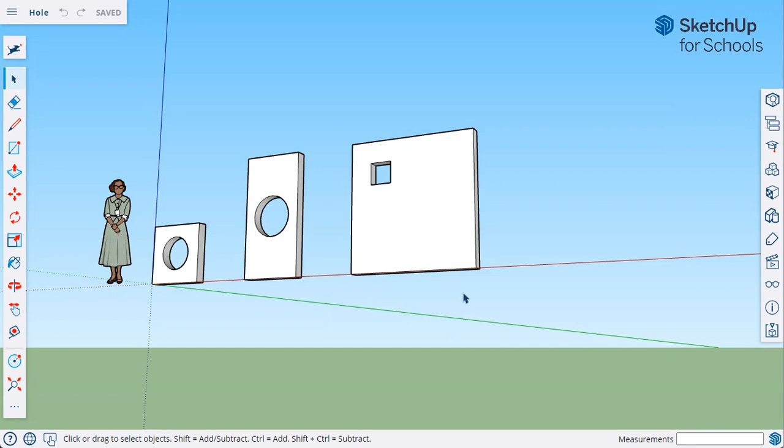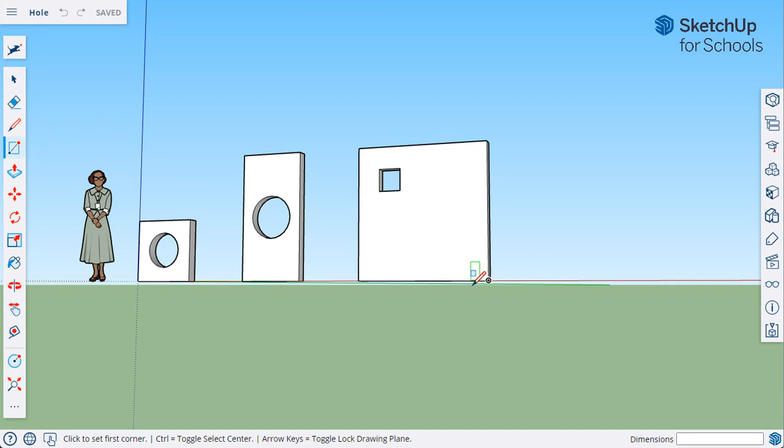Okay, so let's create another rectangle, 6 feet by 6 feet. Let's switch into a view where you have more sky, and then make a rectangle on this face. Make sure you press Shift to put it on that face. Let's just do this here because it's thinking I wanted to still put it on the ground.

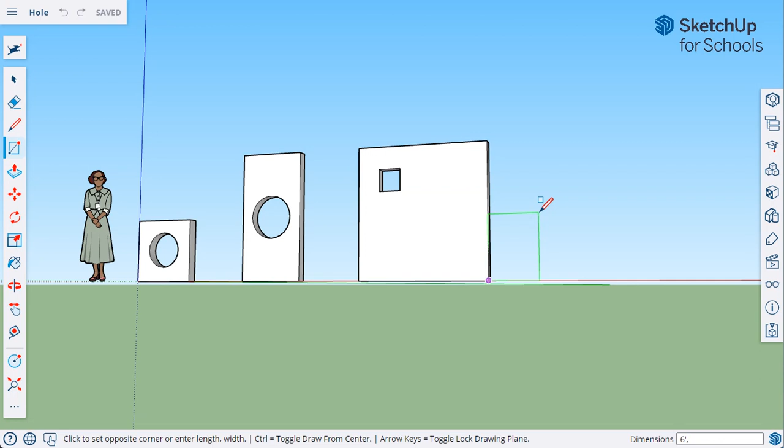Once I have that green, I put in 6 feet, comma 6 feet, and then I move that apart. I go to my select button, triple click, 1, 2, 3, and then move that away 3 feet. And then I'm going to use the push pull button and push it back 6 inches, so I can just type 6 by default.

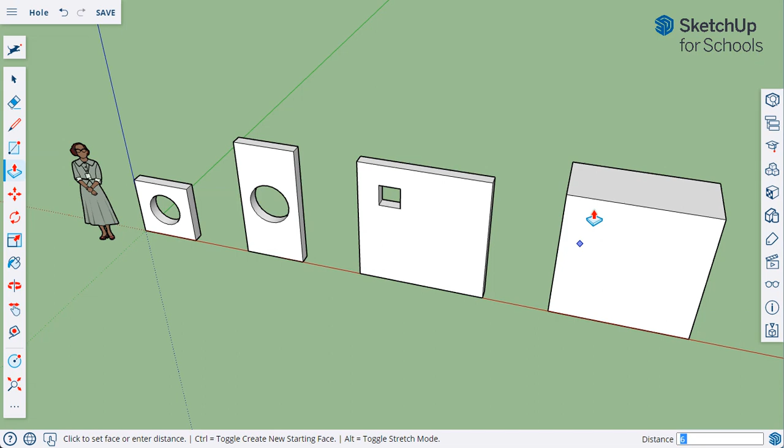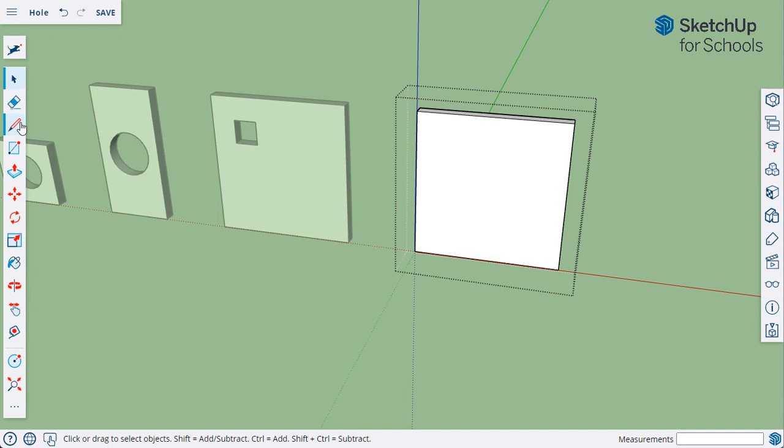And then I want to make it a group. So triple click, 1, 2, 3, and then right click and make a group. And then we're going to draw our hole here, and this time we're going to draw something very unique. I'm going to double click to edit the group, use my pen tool, and then simply form a shape that I want.

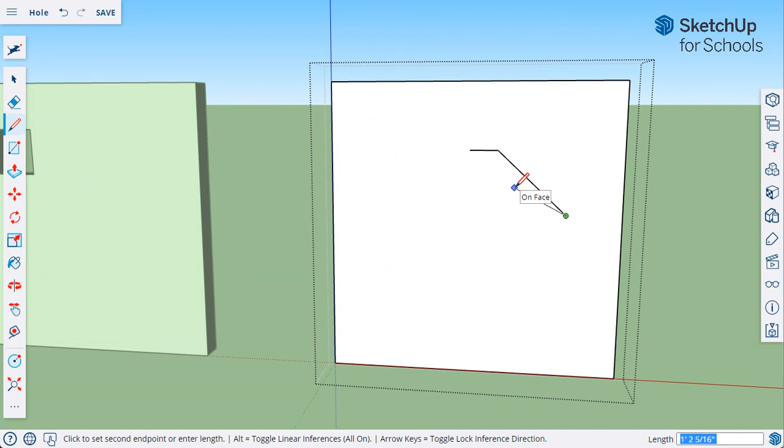You can always switch whatever shape you want. And so we're trying to make it look like a bird.

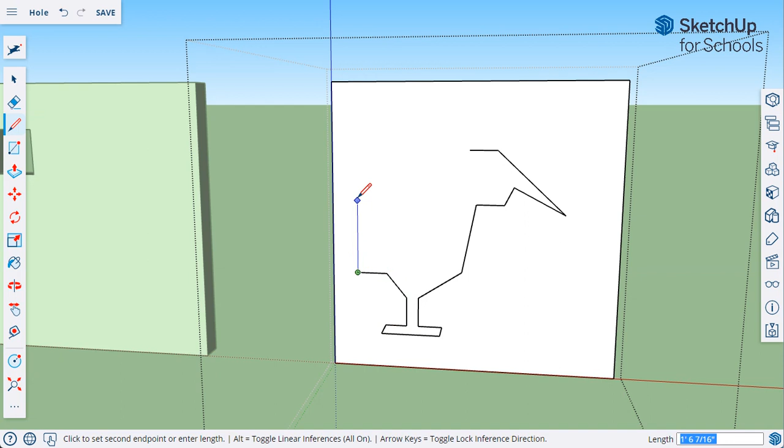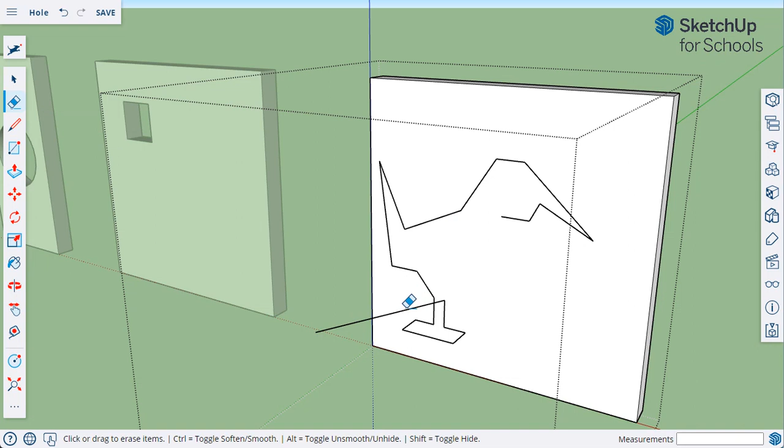There you go. Once you have the shape done, you need to inspect whether it's all flat. You can see some of the shapes are raised up, so that means you need to erase those that are raised up because it's supposed to always be flat. You always want to draw something that's always flat on the surface.

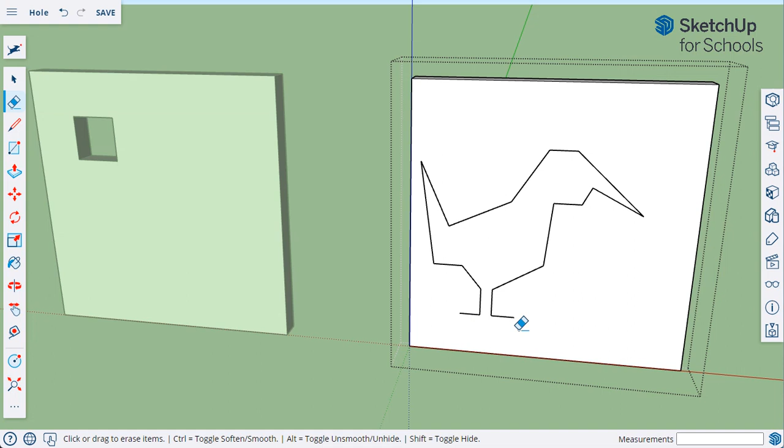Again, inspect it. You can see again something is raised, so we need to erase these 3 lines. You'll know that something's wrong with your drawing because these lines appear thicker, because if everything is flat, it's supposed to be on the ground.

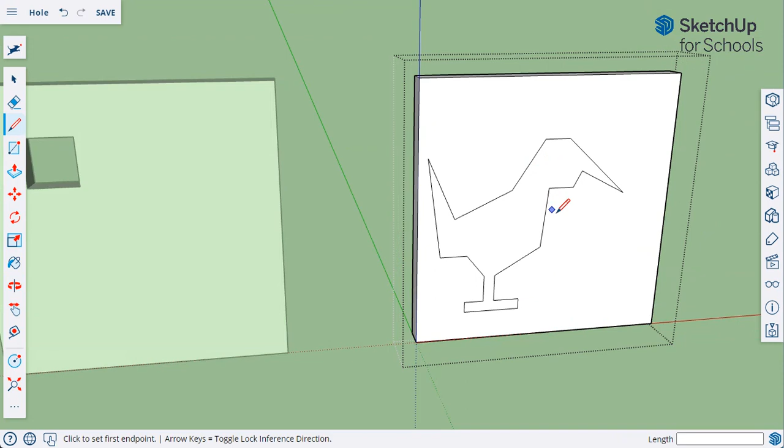Oh, there you go. See how it became thin? Yeah, it's going to turn into thin lines if the shape is all flat and it's connecting to each other.

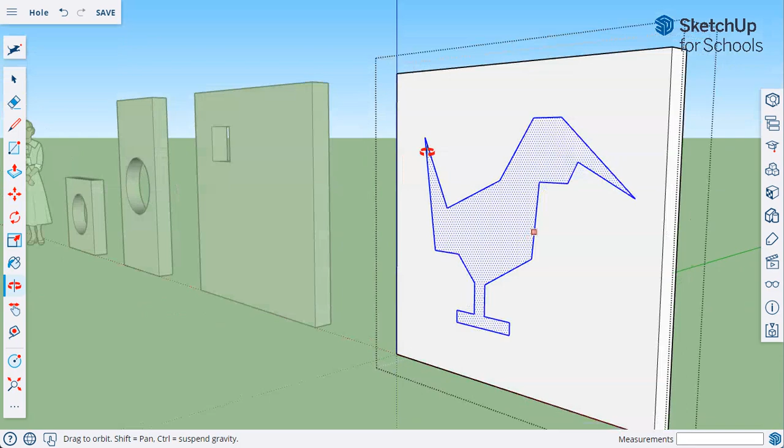Once you have the shape, you can double click the inside and it'll select everything. You can actually move this inside the shape and sort of eyeball how it's centered. Once you are satisfied with its location...

You can now use your push pull and simply pull it and touch the back corner. And there you go, you have your unique hole. It's shaped like a bird.

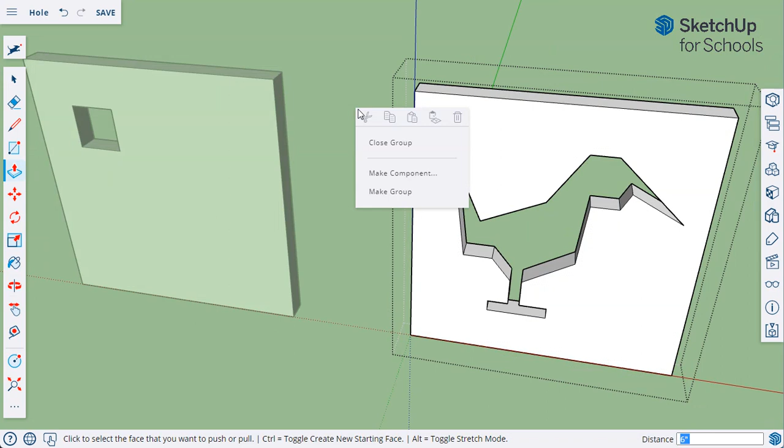Right click and close the group, save your work, and simply zoom out.

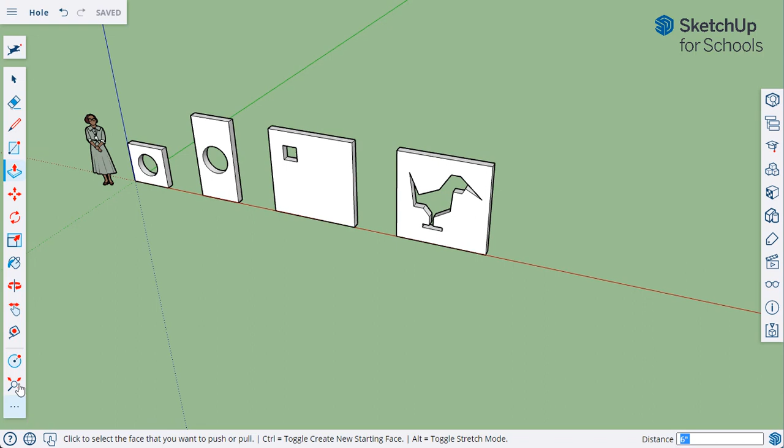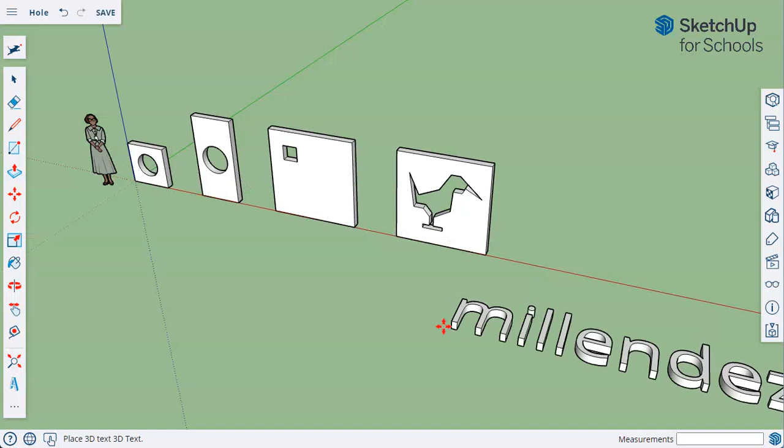This time we're going to go into this view, and then we're going to simply again put our name here. And as I told you, SketchUp updated their buttons, so we're going to do a 3D text. We wanted a height of 3 feet, and we wanted our last name, and our first name. Click OK, and I simply put that on the ground.

So as long as the green axis is towards this side, the red axis towards this side, and the blue axis towards that side, then we're good to go. Simply click anywhere, and then you are now ready to take a picture of this one.

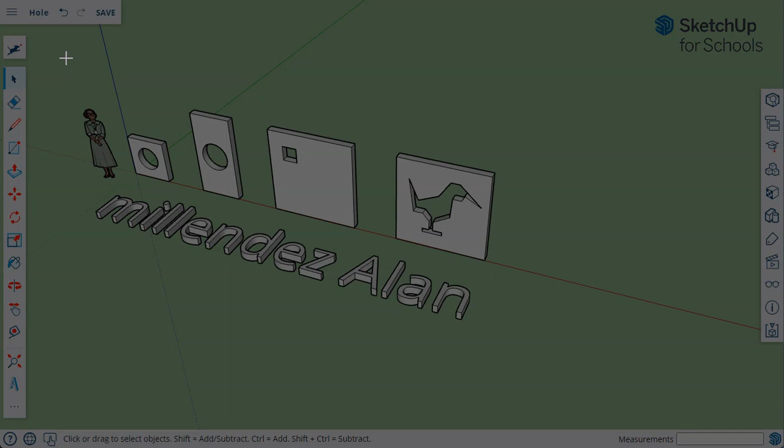In my case, I am using a snipping tool, so I'm going to take a picture of this one. I'm going to go to my Google Drive, create a new Google document, and label this SKP4. I'm going to insert a table, 2 by 3 or 3 by 2, and then I'm going to label this 1, and paste that there. And then I'm done with my first drawing for our SKP4.